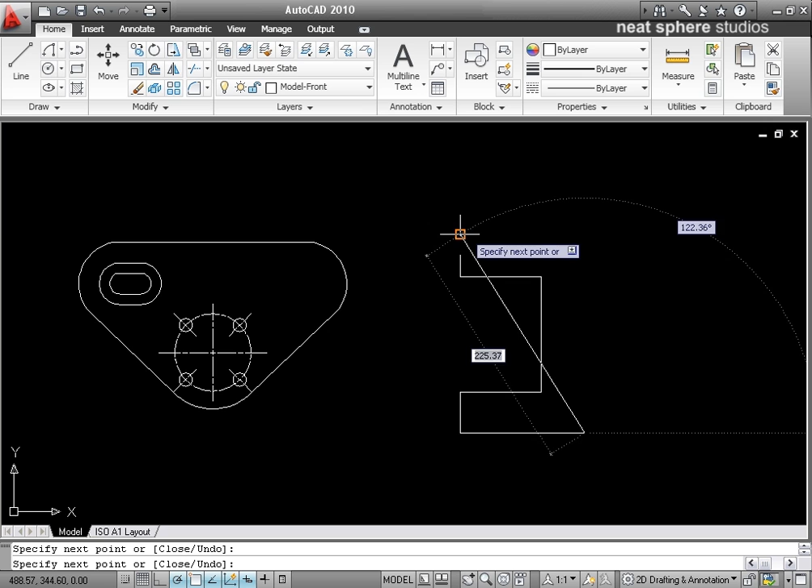So there we go, let's make that shape. Okay, and I'm going to want to mirror that. All right, so I've got two of them, showing maybe an I-beam, maybe an offset of this beam.

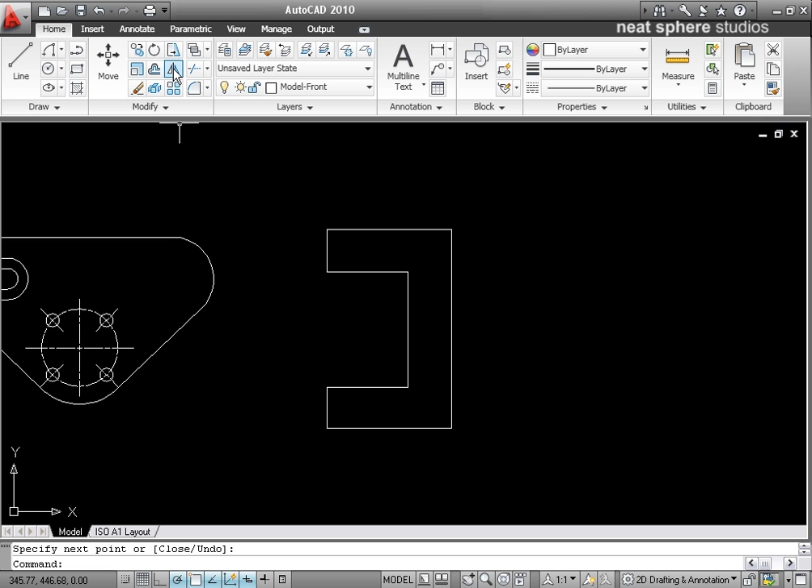So what I'm going to do is go to my mirror tool. I want to make a copy of it, but I want that copy to be mirrored, that's what we're really going for. And if we hold that down and leave the tooltip over the mirror line, this is exactly what I'm looking for, you see here?

So what I'll do is select my mirror tool, and it will ask me to select objects for that. So I'll marquee select all of those lines, then right click when I'm done. And I'll be asked to specify a mirror line point.

Now I could start from there, and what would happen is these two would be back to back. But to make it more interesting, what I'm going to do is offset, and I'm going to offset by maybe 25.

There we go, and you can see here what I've got is a total offset of 50, and my angle that it's being mirrored at is 90. I could mirror that at 45, which means it makes it look as if it's being mirrored at 90 degrees the wrong way, I'll grant you, but there you go, we've got 45 degrees that way.

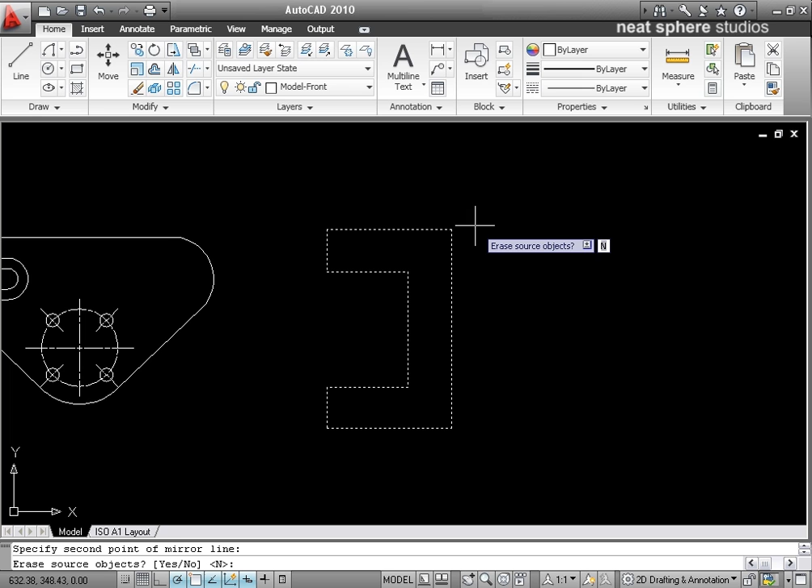Or I'll just go for the straight 90 here. I then get an option, do I want to erase the object or not? Well, really, if I right click, the only option I've got is yes or no, so I'll say no, and there you go. There's my mirror, it really is that simple, not anything more onerous than that.

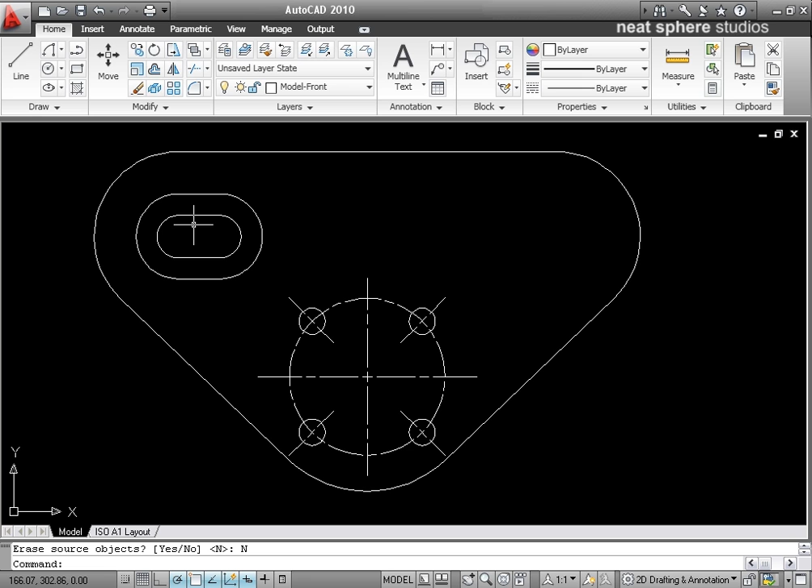So in order to complete this task, which is a little bit more real world, we've got one eye here, which is going to allow us to slip a little bit as we tighten the bolt on it, and we want to have two of those.

So I'll go to my mirror tool, marquee select all of that, right click, and my pivot point will be the center object here. There we go, so now when I come around to 90 degrees, you can see that's going to be a perfect mirror. No, I don't want to delete the original objects.

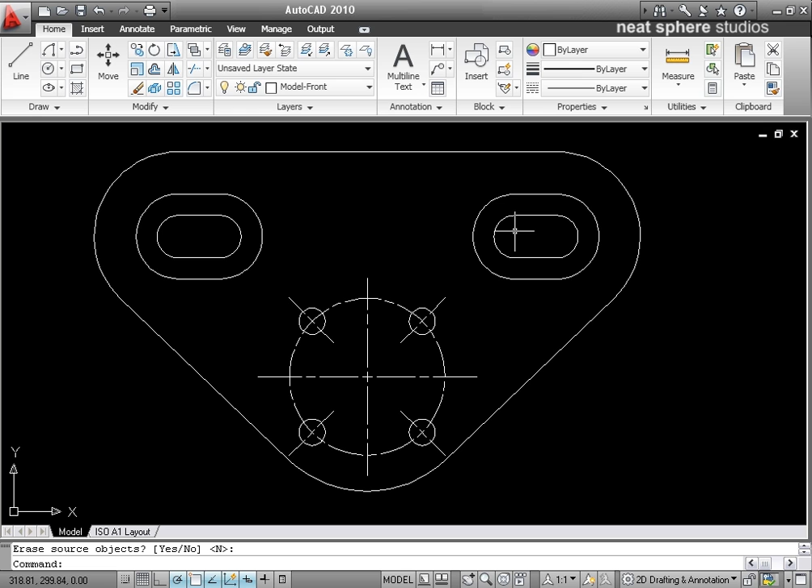And what we've got is, it looks a little bit like a carabiner. It looks as if maybe we're going to have some ropes or lines going through there. Certainly this bit and this bit are going to be allowed to wiggle a little bit. So yeah, nice and simple, very, very easy to do and use. And all we're doing there is mirroring objects.